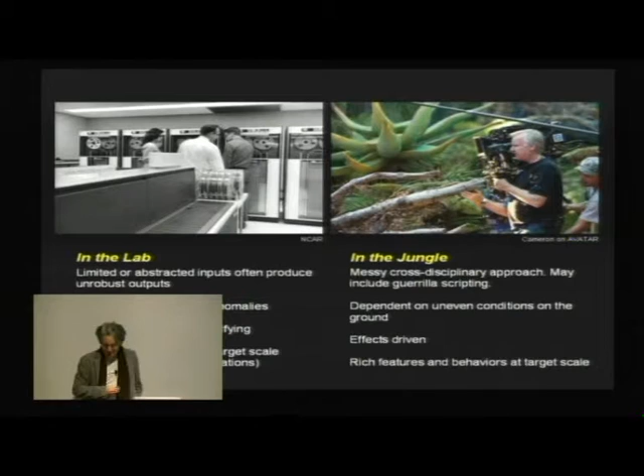This is my father at NCAR, National Center for Atmospheric Research, in the 70s. I used to visit him here. This was the data reels, and we had a punch card lab and all that.

It's also kind of funny that it was a Center for Atmospheric Research, because I consider that to be something I'm interested in as well, in a different way.

So on the right, we have our friend James Cameron and his film Avatar, standing in the jungle. We don't know if that's a virtual jungle or a real jungle or what's actually going on in that picture, but that's why I like it.

The reason I show James Cameron is because I'm very interested in the film business, but that's not why I'm showing this. I'm showing it more because it's a lens for looking at the way an architect can be. I think there's been a lot of discussion today about interdisciplinarity, and making a film is one of the most interdisciplinary things you can do. It involves designers, engineers, film crews, visual effects teams, special effects teams, marketing, distribution, all these things, and including economics. So I think it's kind of an interesting counter model, let's say.

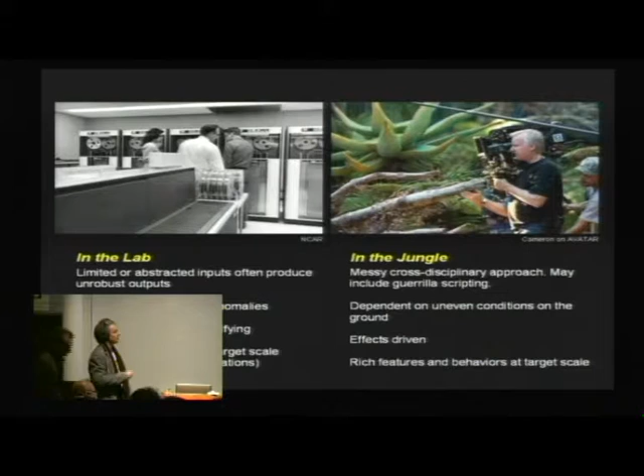Let's say these are two extremes: the lab and the jungle. I think James Cameron probably operates in the jungle. Some of the qualities of being in the jungle are that it's a messy, cross-disciplinary approach. It may include some computation, but it doesn't rely completely on computation, and it may also involve computation entering the project at certain times, maybe not just at the beginning during the generative phases, but later on.

Let's say to characterize a facade or some other kind of building system, it's dependent on uneven conditions on the ground, meaning incredibly context dependent. It's effects driven, and it generates rich features and behaviors at the target scale, whatever that may be. So just float that.

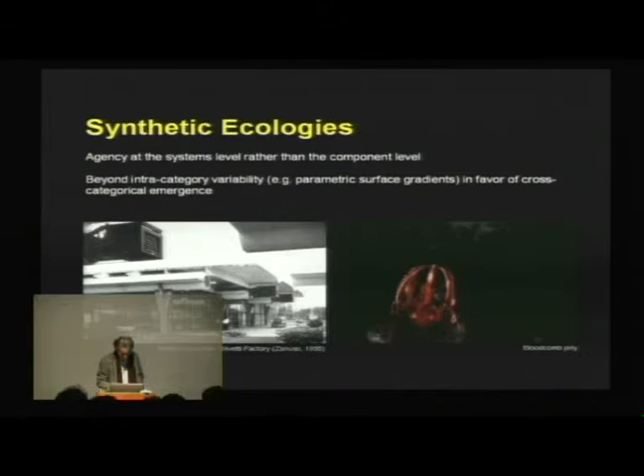A big interest of my office in the last years is in synthetic ecologies, which came up today in discussion, and I think I have a lot of open ears to this at the AA, which I'm happy to hear. One thing I've kind of switched over to since being interested in swarms and agents about 10 years ago is an interest in systems and the agency of systems rather than components.

Part of that interest is in going cross-categorical, meaning avoiding just intra-category differentiation. Let's say one version of that would be a gradient, which I actually mentioned today in the reviews, and moving more towards cross-categorical emergences. The two images are on the left.

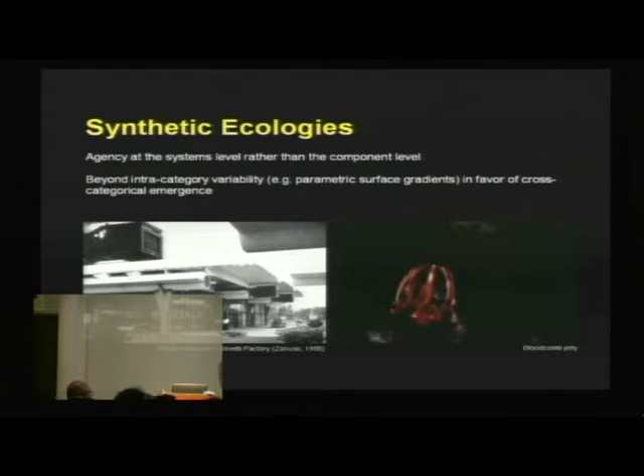You've got the Zanuso Olivetti factory, which is a very early example of someone trying to embed one system within another. I wouldn't say it's in a state of emergence yet. I would say there is definitely a hierarchy there, the structural hierarchy over the mechanical. But what's really interesting is that you do have the possibility of interweaving mechanical performance and structural performance in a single building.

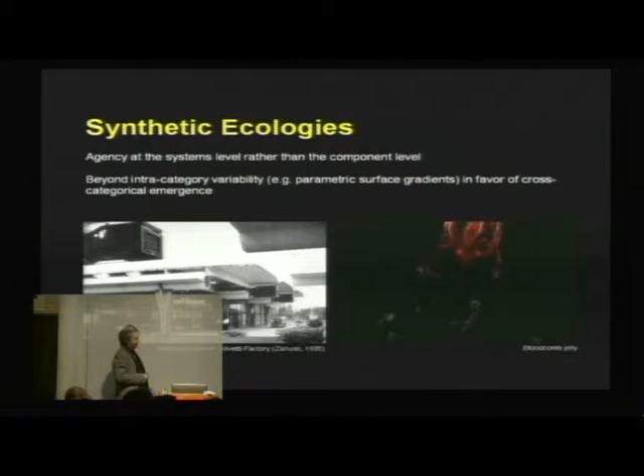So on the right, a counterexample to that, or an extension of that interest, would be the bloodcomb jellyfish, which is super interesting because it's actually a composite of two different creatures: on the one hand, a bioluminescent bacteria, and on the other hand, a transparent jellyfish.

The way this works is that the bacteria gets access to additional food sources, and it's also protected by the jellyfish, so it's getting that from the relationship. The jellyfish, on the other hand, is getting a kind of stealthing mechanism. Because the predators of this jellyfish are in deep water and it lives at midwater, there's a kind of interference pattern that goes on between the color kaleidoscope effects and the sunlight bouncing off of the water. So it's a kind of stealthing mechanism.

So I would say that the bloodcomb is a kind of emergent third organism, and that's precisely what I'm interested in in terms of the integration of systems.

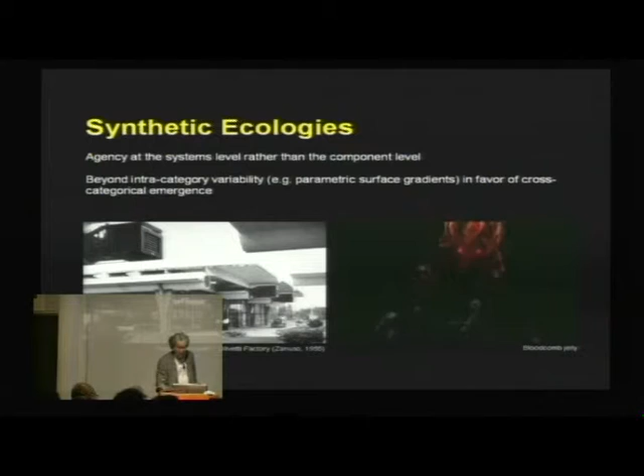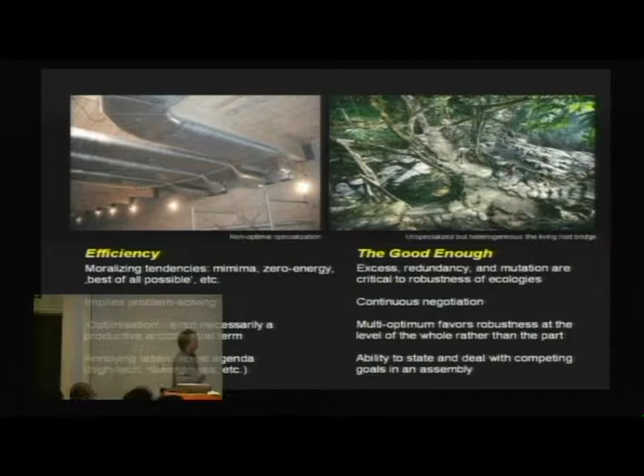So things you find in nature: excess as a matter of course, redundancy. In all systems you find redundancy, and mutation are critical to robustness of ecologies. You find continuous negotiation. The multi-optimum favors robustness at the level of the whole rather than the part. And within this good enough, you have the ability to state and deal with competing goals in an assembly.

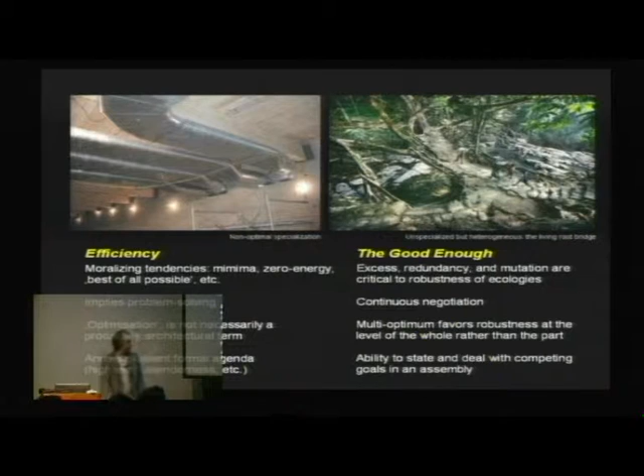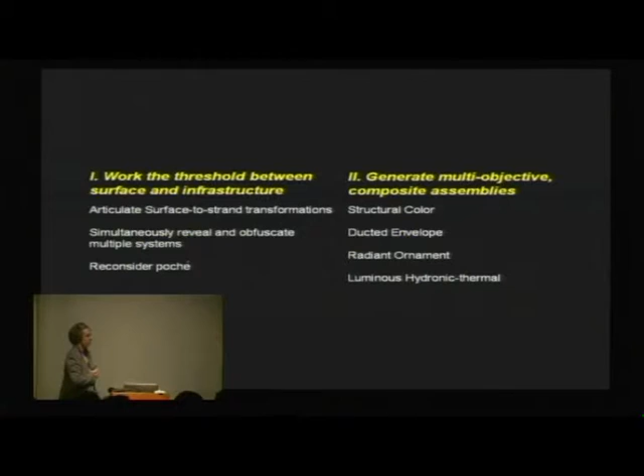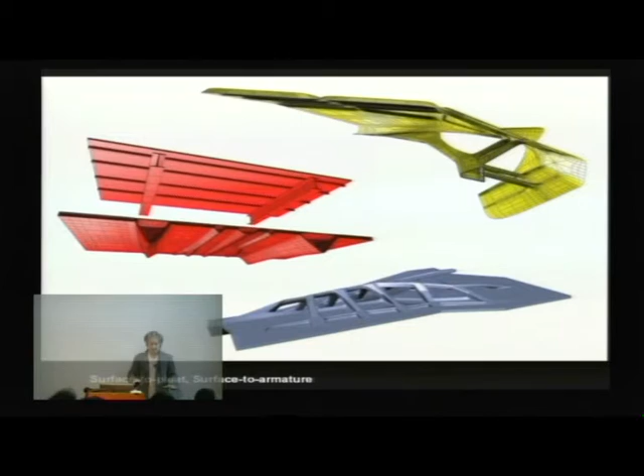We won't do that one. I'll show you the beambrane in a minute.

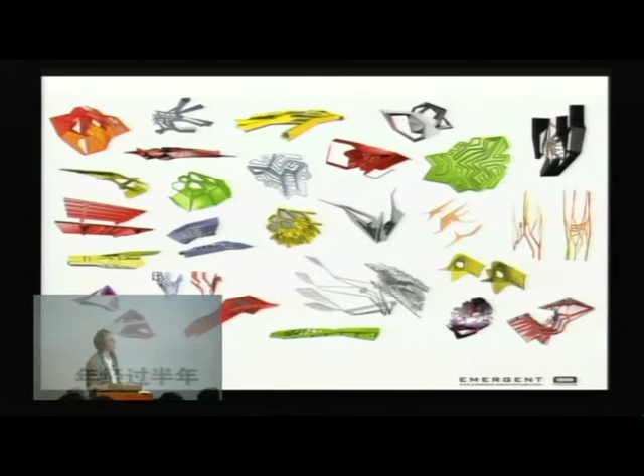So here's a few of these guys. We have this huge collection of these things, and it's getting kind of fun now. It's kind of a menu, not that we order off of it, but they're collecting. I call it the menagerie.

And if anybody speaks Chinese, I would still love to know if this says menagerie. I doubt it. It was published that way, and I still don't know. I heard something that it's not right.

So it's the menagerie. It's the zoo of a lot of these species that we've been using for various projects.

And now I want to show a couple of prototypes that are a little bit more in depth, which were developed in the summer this year, with an interest in developing multiple systems in prototype form, meaning in sort of a chunk rather than in a whole building, and also with a consideration of materiality.

In particular, the place that we are in right now in history, which I would say is very similar to the one that Viollet-le-Duc was in about 150 years ago, right at the moment where stone load-bearing construction was giving way to iron and eventually steel construction, which I found a kind of hybrid, interesting point in history.

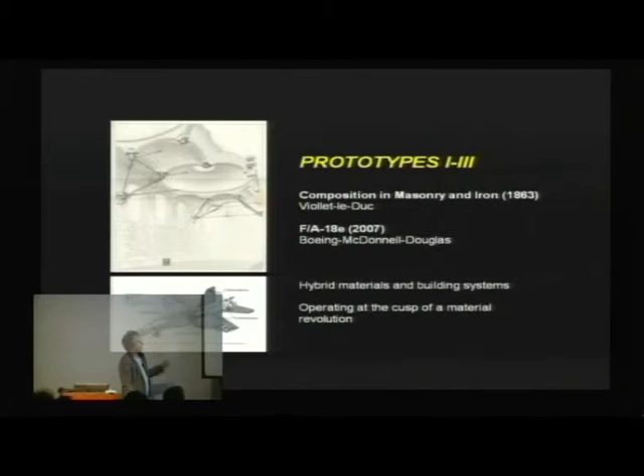Also looking at, of course, aircraft construction, which is all about different kinds of patterns: aluminum, carbon epoxy, steel, everything known to man is basically in these airplanes now, with different kinds of configurations, and also produced by different companies.

So the first one is called Thermostrut, and Thermostrut is a kind of combination of something which is a structural system, a skin system, an aperture system, and also something that generates thermal solar energy.

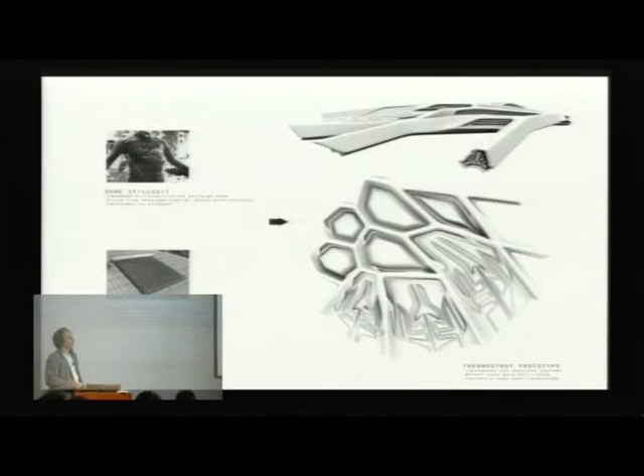Maybe I have a better picture here. So this is still in the realm of frame and skin construction, but it does have a more active relationship between the frame, which is this custom welded steel profile, and the skin, which starts to relate to the profile. And then it also has embedded tubes for solar thermal, and then also other areas which are made out of composites, which also contain fluids that flow through it.

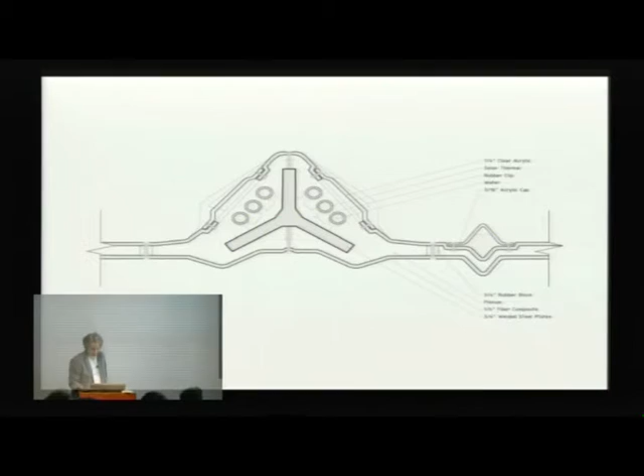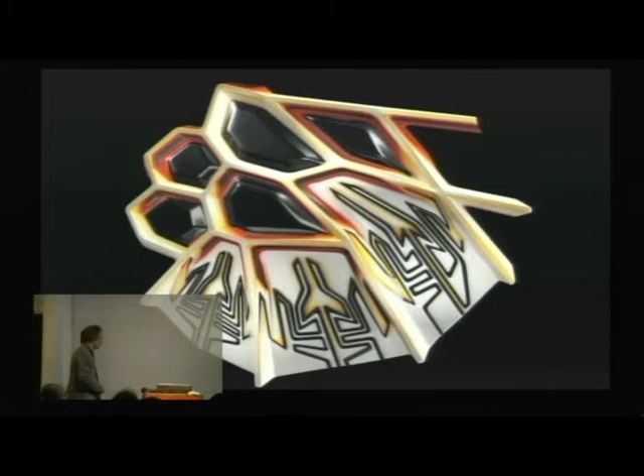So here's a model of it, and you can see here that there's also color associated with this prototype. So it's operating on many levels. It's generating thermal energy, it's structurally sound, it has apertures, and it also has this kind of ornamentation that ties it all together. This color and ornamentation that ties it all together.

So some of the solar thermal is embedded here in these black tubes, and then also some of it's embedded actually inside of the apertures. So that's the first prototype.

Another one is called the lizard panel. The lizard panel is basically a combination of an algae system. Algae systems are photosynthetic systems that can generate oxygen as a byproduct, but they can also generate biofuel and hydrogen gas. They can generate a whole lot of different things depending on the additives that you put in it. The thing about them for me is that they're usually applied in a kind of industrial application.

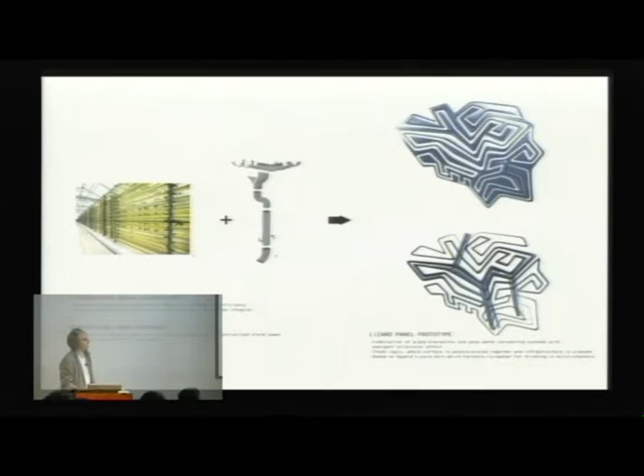So the idea was to loosen that up, but also combine it with a water reclamation plant. Here's the model of it, where you start to get an algae system embedded in the panel, which is a separate tube here than the surface. And then also these areas in the panel which can collect water, so these kind of depressions that wind around and through the algae system.

The most interesting thing about that for me is that if you try to understand the thing as two different systems interwoven, they're not just laying on top of one another, but they're interwoven in such a way that down below the panel, you start to get some structural performance by adding depth between the two systems.

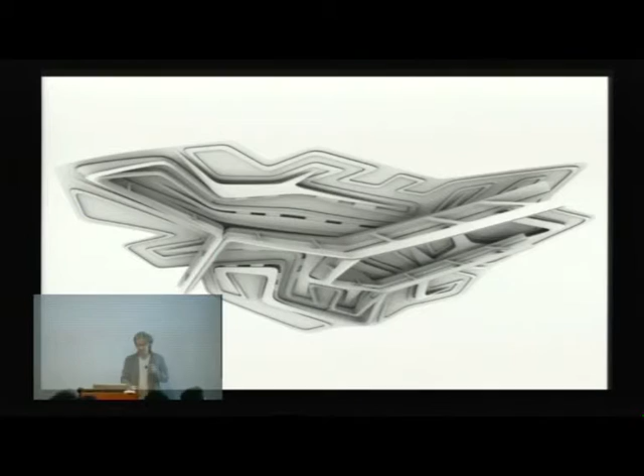The third one is called tracery glass, and it comes from an interest in stained glass, and in a rethinking of the high tech — let's say Renzo Piano, whose building in LA used to be right across from my office, so we looked at it all the time.

And trying to deal with the layering of systems that goes on in a Renzo Piano building, or at least the one across the street from us, in terms of shading, cooling, and structure, and then thinking about the beauty and simplicity and emotional response involved in stained glass, and trying to think of an alternative to either the purely ornamental or the purely technological. So we came up with this.

What's going on here is that you've got a structural system. You have these apertures, they're bubbles, so it's a two-sided system where you can generate a lot of heat. That heat is picked up by coils here. So again, we have a solar thermal system, and in addition we've got a solar PV system right here, which is also embedded into the windows, with its associated wiring and all of that.

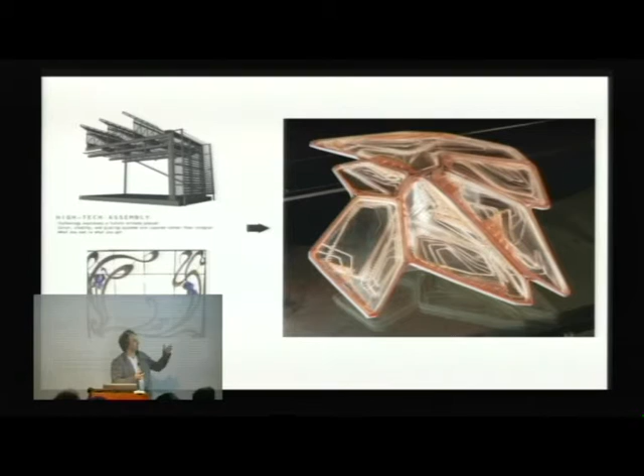So through the deployment of these different technologies, you get some sun shading. You get an impeded view out through the glass, so it's no longer a kind of modernist idea of glass. I actually like the effect of having these things embedded in it, and you've got these other things going on, this energy generation as well.

This also took on layers of color, which I liked very much in the sense that they could begin to dissolve the structure versus the polycarbonate panels here, and start to tie everything together in a much more loose and gauzy way.

Okay, so here's another project which is a kind of prototype. It was for an exhibition last year. It's called Batwing. Batwing came from looking at a lot of ceilings — I've gotten kind of obsessed with ceilings, in particular ceiling panel systems, and also fixtures.

I mean, here actually I was checking these out today. I don't see too many — at least you don't have too many air exhausts in here, but you do over here, hidden.

I think ceilings are something that have been left out of a lot of discussions. Not because the ceiling is particularly important, but because it tends to be a place where a lot of fixtures are put in a haphazard way based on building codes, and never really dealt with architecturally. So I thought this is an interesting place to start, also because there tends to be a lot of technology in ceilings — rethinking the air diffuser, the problem of the air diffuser, and also the ceiling system.

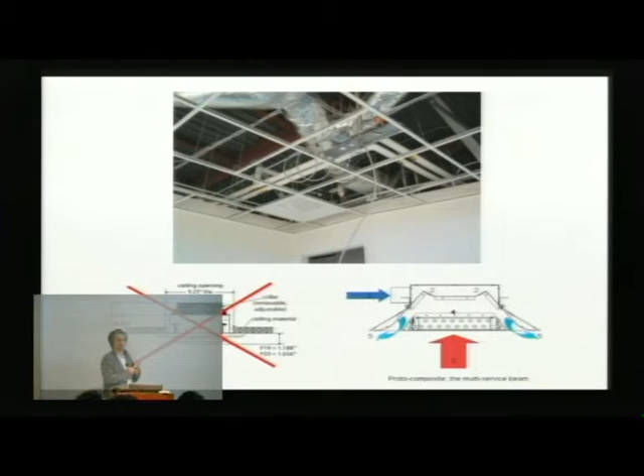One example I found, I think, is a proto example of a new way of thinking about technology in the ceiling: a multi-service beam. It's not custom, but it comes with a cooling element, lighting, fire alarms, and all that kind of stuff embedded in it. I think it's a kind of tool for engineers, but it's not yet architecturalized. That was the goal of Batwing.

Batwing is based on a fluid system, a radiant system for heating and cooling, and a microcapillary system, meaning tiny little veins filled with water. I think microcapillary systems are coming up. We'll find them very soon in a lot of architectural surfaces, so I wanted to take that on.

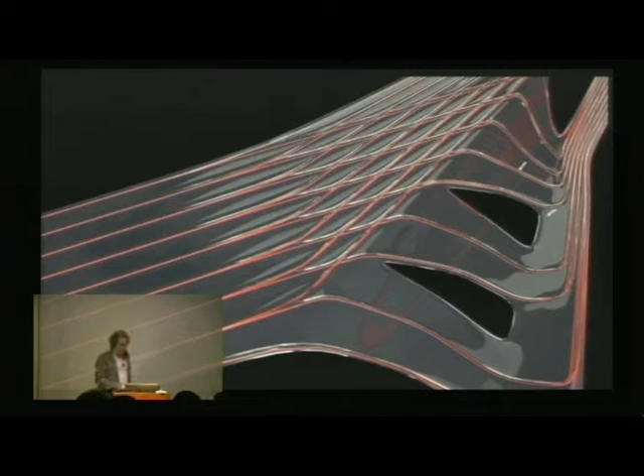That's one component. The other component is a morphological one, where through double delaminations of the surface, we start to get hollows through which we can send air, at the same time increasing the structural performance of the ceiling.

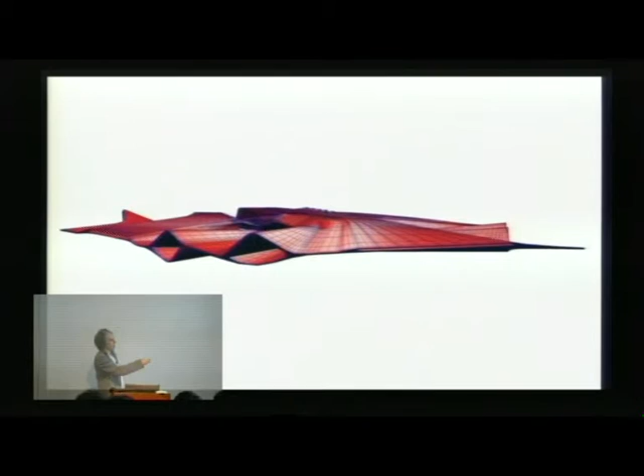You see here how there's air distribution going through this thing, which is then passed along this lattice of microcapillaries for heating and cooling. So you don't have central air—you just send air where you need it to go, and then run it across for heating and cooling locally with this water system. There's also lighting associated with it so you could actually see through.

So this is, say, in the room, and this is from above. This thing doesn't—it's a prototype in the classical sense, it doesn't solve all problems, it doesn't have a particular scale. It's just kind of a study.

One important thing is the types of morphologies going on here. You have the surface to pleat, where you start to register things in surfaces. Then you have the surface to armature, where the pleat actually begins to pull off and become an armature. And then you have these microcapillaries inside of a microrelief on the surface. This stuff is, if not more important than, the technologies embedded in it.

Here's some pictures of that prototype in my office. We had it made in China, of course, and at the show. So here's a quick building project to show an application of Batwing at the building scale.

This is a project I did with Yansong Ma at MAD. He was the client and master planner of a pretty large development in Guiyang about a year and a half ago, and it involved a lot of high-rises. Our project was a high-rise, 110-meter building, and the idea was to take on a dual interest there.

One interest was taking on mechanical systems, starting to architecturalize them, but doing so in a way that does not continue the structural expressionist movement from the 80s, but is much more contemporary and allows for a kind of gauzy, lighting, luminous effect in addition.

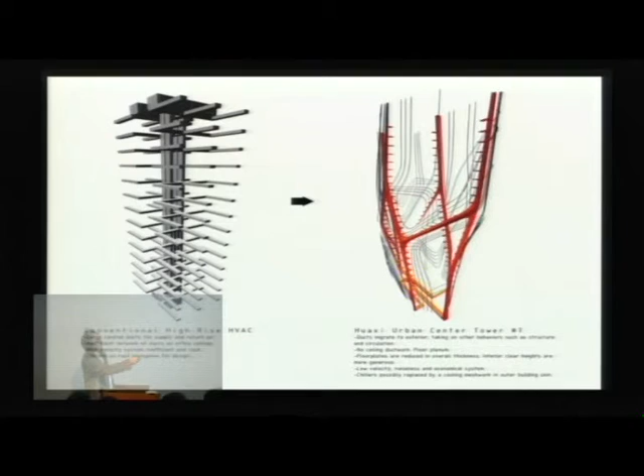So here's the basic technology of the thing. It's intended to be a series of super columns around the project which take structural forces, deal with lateral loads, and also deal with the movement of air, pushed through by the stack effect.

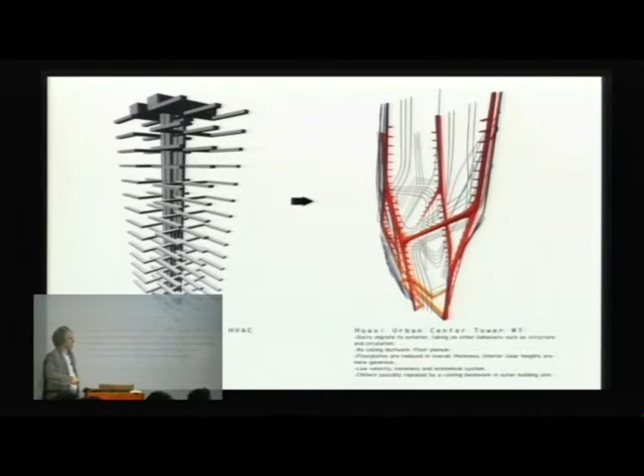Then there's another system, a system of microcapillaries, which is about expelling heat. The idea here was that instead of having a condenser on the roof like all high-rises have, we unwind the condenser and spread it all over the architectural surfaces as a gigantic heat exchanger—an alternative to a conventional system using risers and ceiling ducts and all those things.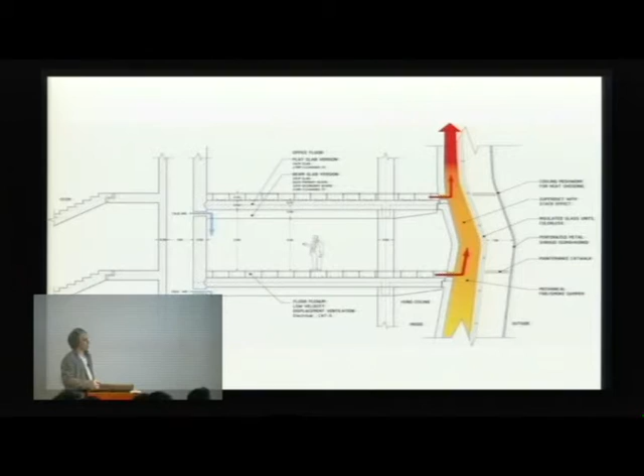The air is brought out of the building and exchanged, and then the cooler air is brought in. In plan, you see how one of these double delaminations might work.

In this case, it's not just a single prototype material, but it was broken down into a facade that goes around and becomes a megapleat, and a structural member—a precast concrete member in the back—which has holes through it in order to get air locally into the ducts at the floor level. There's an additional outer layer, which is perforated, allowing for that gauzy effect, so you don't necessarily read ducts on the exterior, but understand the thing as a whole composition of lighting, structure, and mechanical systems.

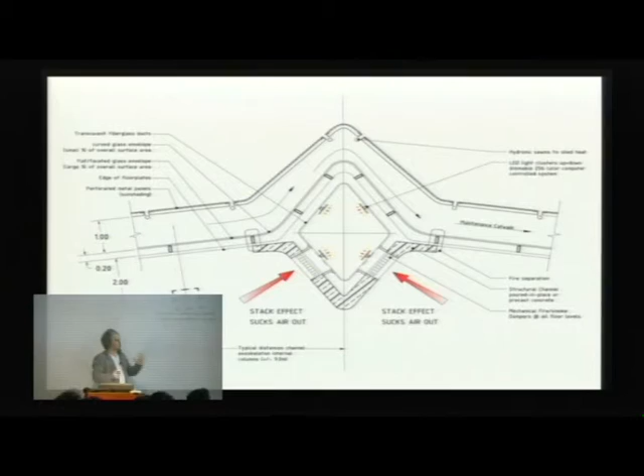Different project, this is from a couple of years ago. It's called the Novo Pavilion. It was a competition, and it comes from an interest in combining a grid-stiffened shell logic with alligator skin, or let's say variability in alligator skin—actually very much like the dragonfly. It goes from quad cells, which are armored and very stiff, to elliptical and round cells, which are all about flexibility. So trying to apply a kind of more biological logic to something which is an important architectural type, the grid-stiffened shell, or lamella construction.

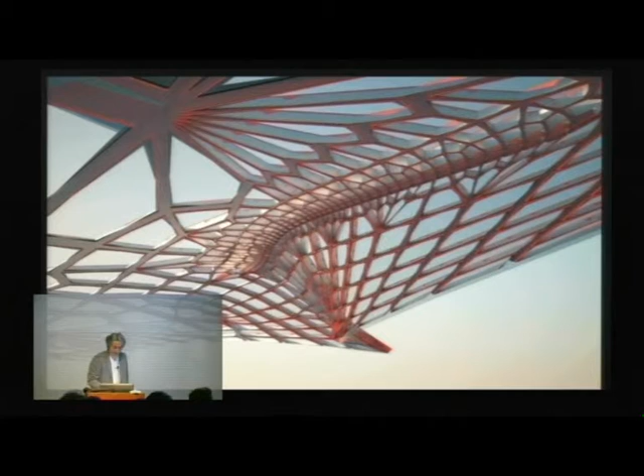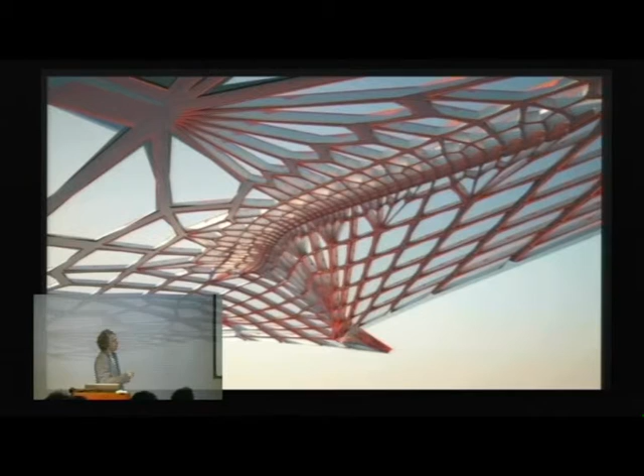So here's a first study of how that might work. The thing we were going for was a lot of difference inside of the system that could respond to different factors. This one doesn't have depth variability yet, but that's one of the factors that changes. The other factors are going from a grid to a kind of branching system, to even a radial system in some areas. So the intention was to have a much more radical difference in the pattern.

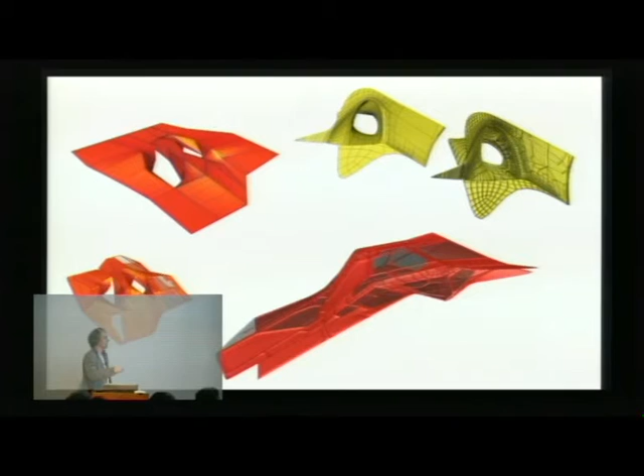So here are some studies, some of which are relatively straightforward—they key pattern to curvature, so you have a lot more breakdown of pattern where there's more curvature, and you don't in other areas. And then other ones have a lot more work done on them by hand, and also with the engineers, as to what are the main force lines and what we're going to concentrate on here. A kind of editing of a natural panelization that comes out of the software we are using.

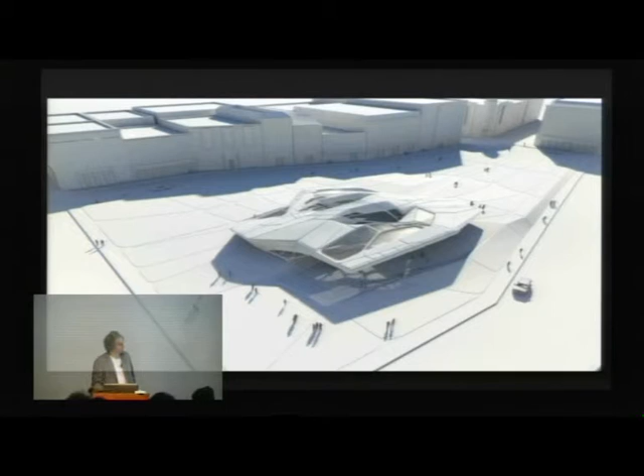So this is the project. It's really just a pavilion, it doesn't have a complex program. Interesting here is the shape, and not just the pattern—the shape was critical for holding the building up. So what we have is a slightly arcing roof, but it's characterized by these two large vortex-like areas, which basically add double curvature to it, which increases the overall stiffness. So they're like two gigantic super columns organizing the space and also acting structurally.

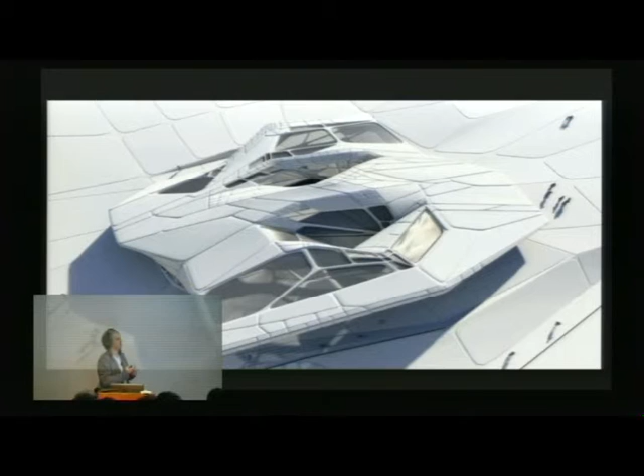So this pattern on the roof, again, is an architectural pattern. It's not just a response to particular parameters relating to surface curvature or engineering parameters, although those are taken account of—it's also a pattern that was precisely designed for a certain kind of character. There's depth variability in the system as well. This is the elevation, and from the top.

So this is a similar project. It was done a little bit later, but I guess it builds on the Novosibirsk project. It was for Sundsvall—it was a competition for two theaters in Sundsvall. One of them is a concert hall, and the other one was an opera.

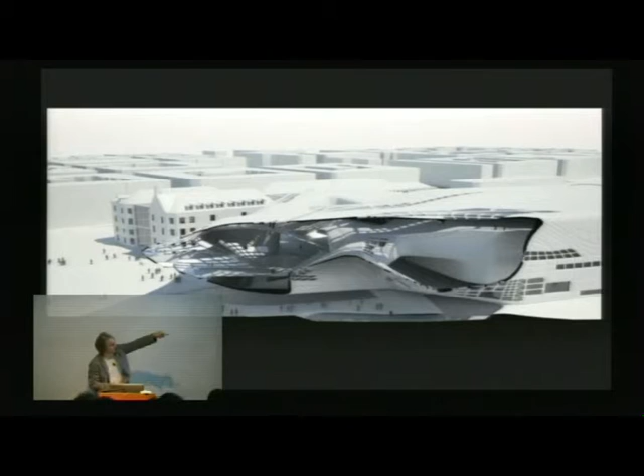This project was also interested in relief, interested in structural variability, and in this case we wanted to take the idea of the shape of the overall thing to a new level, which was to make these involutions more interconnected and also force them to do more work than just structural work. So they actually go inside and become the circulation of the building. These are the theaters. So this thing's a kind of topological continuity from inside to out—the theaters are right here, and then it sucks back around like a Klein bottle onto the exterior, which also happens to provide a main loop of circulation from the ground level up into the two theaters.

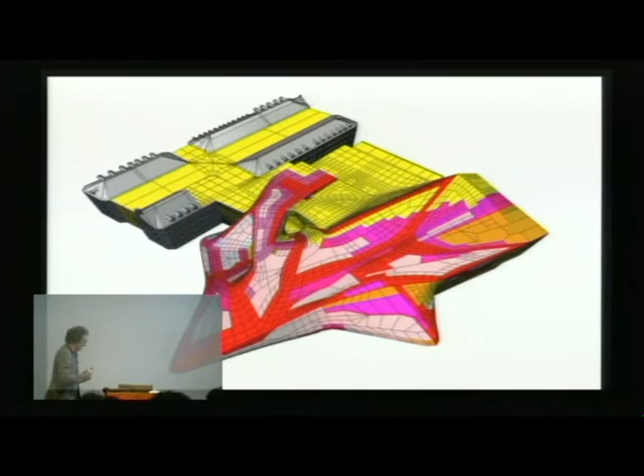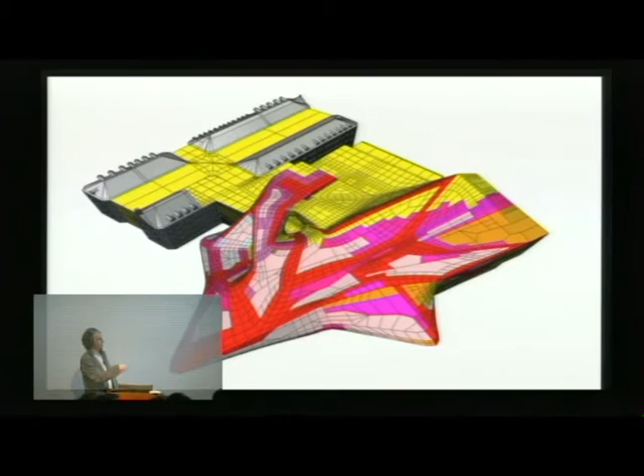One important thing for this was, again, a competition done very quickly, but with Buro Happold on this one, and really fun to work with them. We basically set them the task of doing the fastest structural parametric model of all time. So we sat down, and in an afternoon, with some very unrigorous structural analysis, we decided the main force paths going through the structure, and some secondary zones where we needed additional depth to the structure. We used this as a basis for further modeling on the project, and added some control lines so that we could add depth variability to the structure.

We also associated window openings with depth variability, as well as with actual views outside of the building. It wasn't a one-to-one relationship where deep structure means windows, but that was one of the ways we started to associate things together.

Then there was this idea of having the interior switch in terms of kind rather than just degree. So sometimes we have a shell construction with some relief in it, which then skips and becomes a kind of truss network in areas where we need additional spanning. This is where it gets interesting, where you're not just increasing depth up or down, but actually switching systems from a shell-based system to a vector-based system.

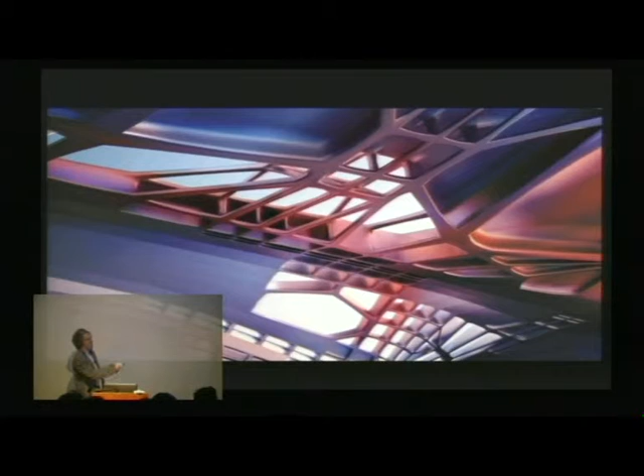And in addition, we added the layer of color to that to make that more intense.

Okay, so this is Dragonfly. It's based on what I mentioned before — I described the wing already and the kind of dual morphology. I did Dragonfly with Buro Happold, and we had endless discussions about this project, which was quite fun.

The Great Court for Norman Foster — they also did, I think, a more interesting building, the Smithsonian with Norman Foster, which takes on some of the logic we were working with. Basically, the idea was to search for variability in the structure that would increase the performance of the project, but also increase the aesthetic characteristics of the project.

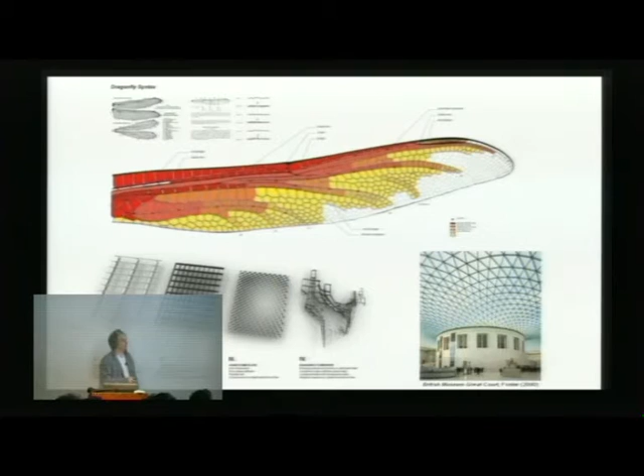So this is not about engineering optimization per se, although there was engineering done on this one at a higher level than the competitions. We used this idea of veins to locate areas. We took the logic, the grammar, from the Dragonfly Wing — basically the quad cells, which are folded areas in the wing, versus the membrane areas.

We weren't interested in reconstructing a Dragonfly Wing, because clearly that's about performance in the air — this thing is not about that. It is a canopy project, but it has multiple points of touching down inside of the gallery. This is the SCI-Arc gallery, and it was an exhibition there.

It was an installation, and you can see we basically started in the middle of the gallery and worked outwards, grabbing onto things that were available structurally. There were only a few things: a mezzanine in the back, which was steel, a concrete column, and a few other things, mostly in the back. There's also a big sheetrock wall which we couldn't put any loads into.

So it ended up being a kind of a setup — we forced the thing to cantilever 50 feet with a 10-foot backspan, just to see what would happen when extreme forces run through it, and how it would begin to reorganize morphologically. Here's how it's connected in the back.

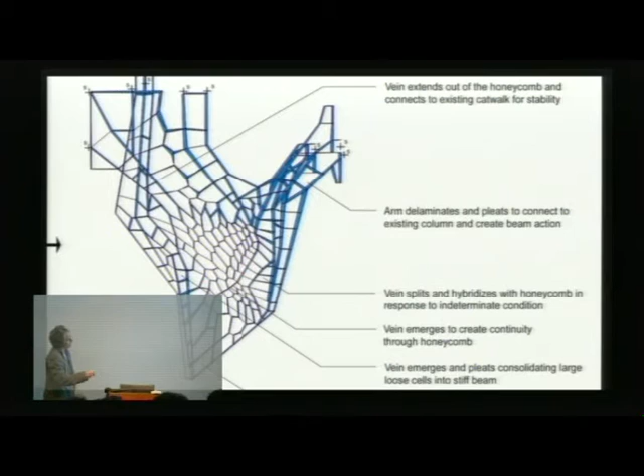There were several boundary conditions applied to this thing in ANSYS, which is a population-generating software — cell size, cell density, overall depth, and local depth, among other boundary conditions, which started to differentiate it more and more. You can see an early version versus a later one. The process took two months of engineering, feedback engineering, and some of the parts I really got excited about came from the engineering software.

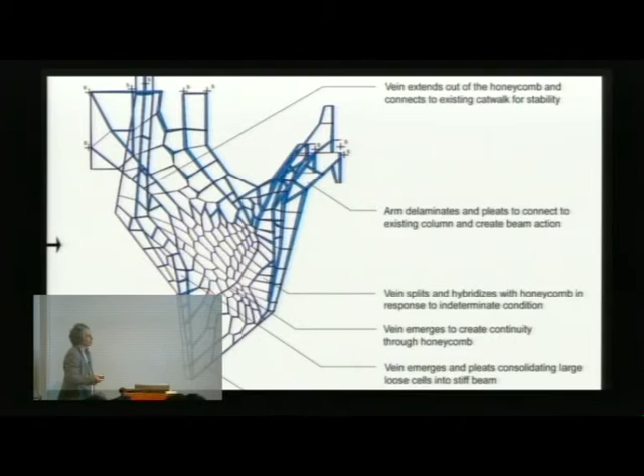First, the reorganization of a lot of the membrane cells towards the center of this thing, where there's some vaulting. And then also some hybrid moments where you start to get linear elements somehow related to the quad cell areas, but which actually begin to run through the membrane. So you get these hybrid areas emerging out of the interrelationship of both the shape and the pattern logic.

I'm going to cruise through some of these here.

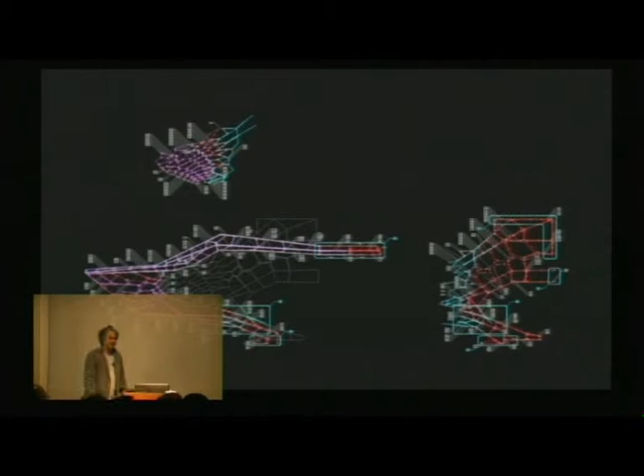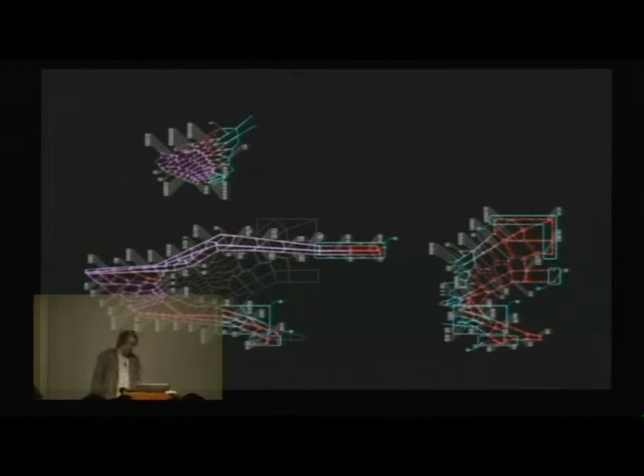This thing was also done in CATIA, which was a learning experience for me. This is the parametric plan that we got out of CATIA, so it was always being updated based on the engineering. Very, very easy to update. All of the leaders, notes, and angle information were constantly updated as we worked on it.

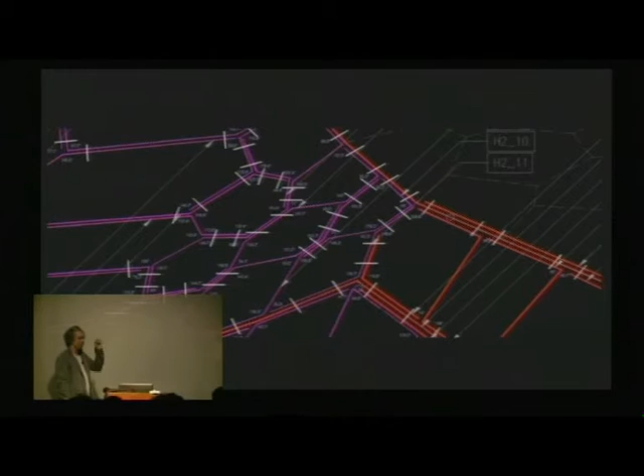This is also one of the more interesting parts of the project. Here you can see where we also, as a final boundary condition, as a way of fine-tuning the structure, developed a construction system where we could layer material. This is all 1/8 inch aluminum, and there are some panels which are only a single layer, and others which are 4, and extremely thick areas which are up to 11 or 12 layers. The idea wasn't to throw material at Dragonfly to make it work, but that was a final way, after dealing with shape and pattern and all the ways of refining the architecture, to just make it work. But that also had a nice quality as well.

In CATIA, you can visually pull all these panels apart so you can tell the difference in how many layers they are, and these are all the bolts and all the angles and stuff you need to build it. So there's a packing algorithm that we used. There's the piece.

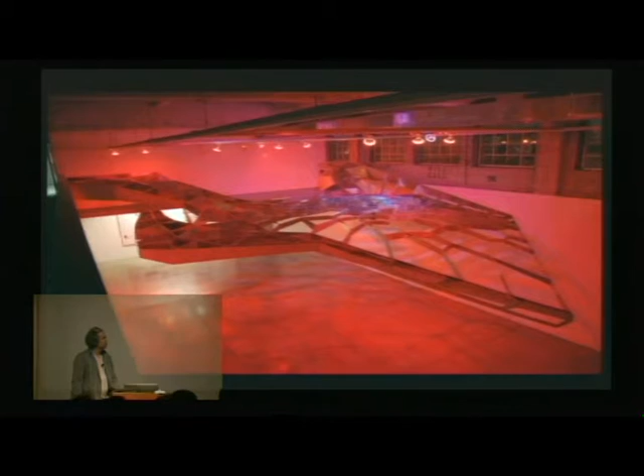I was a little sad about all the bolts. We were going to do structural adhesive, but the engineer didn't want to do it.

So here it is. You can see really big differences in depth. Some vaulting here, this is a delamination. You can't see the top leg of this thing, but it's been delaminated, and the leg is grabbing top and bottom on that side. Here it's grabbing up in the corner and then underneath the mezzanine.

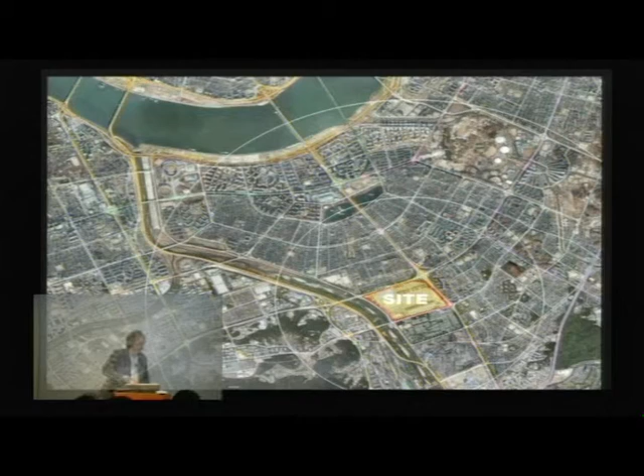This is a much larger project, but it was a chance to take the Dragonfly logic to a building scale, which was always its intention. This is called the Garak Market in Seoul, Korea, done together with Changjo architects in Korea last summer. I think the students did a fish market here too. This thing is also a fish market—it's the biggest one in Korea.

Really interesting building type, sort of accreted over time. The idea from the government, from the mayor, was that we should offer more green space, number one. Number two, that we should ameliorate the smell of fish, and number three, that we should offer some kind of public functions.

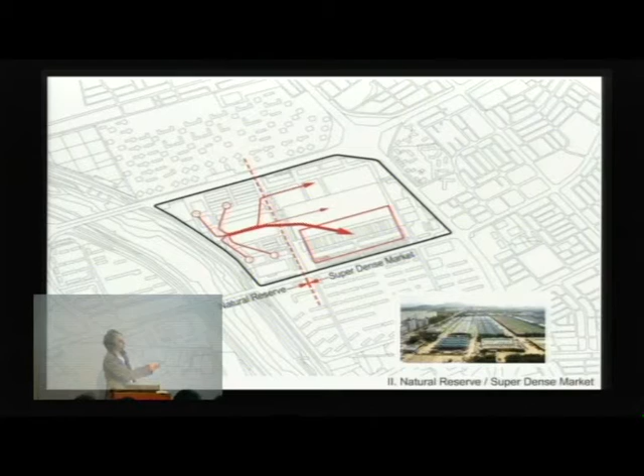So the first idea with the local architect was to take a lot of the market here that's close to this canal and double it up on the market in the back to open up a wetlands area. Probably the reason why we lost the competition, I think, in retrospect. But this was the main move—to double up the size of the levels of the market and have trucks accessible to 2 levels of market.

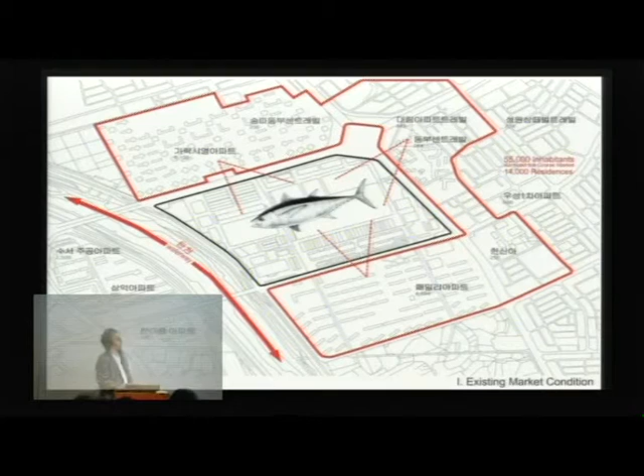Then we also wanted to propose a kind of roof landscape to get rid of the problem of the fish, at least the visual problem of all the fish guts and that stuff. And then we wanted to offer this community garden to all the people living around here. There's about 60,000 families, and we thought it would be nice if as part of this roof structure we could offer these little micro gardens.

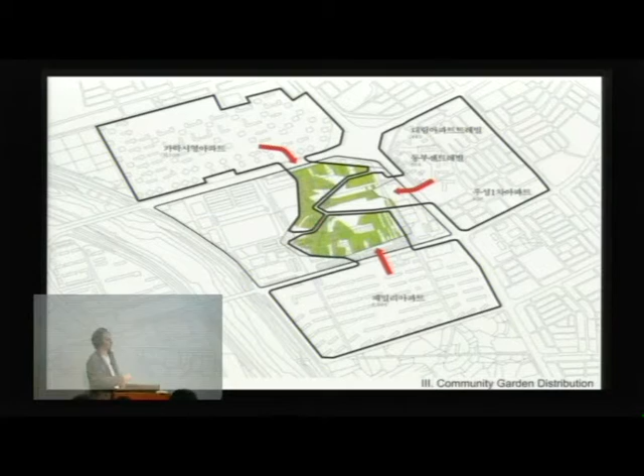So we thought about patterns of patterns and flowers and vegetables and all these kinds of things—organic material, but also a structural principle. The structural principle was based on dealing with the fact that the market required a very ruthless and rigorous column grid, and then an area which would begin to be more loose and open-ended, and also cantilever out. So that's how we set up the pattern.

The thing is about 1,000 meters long. It was a pretty big project. So the ground level's relatively straightforward, tons of market.

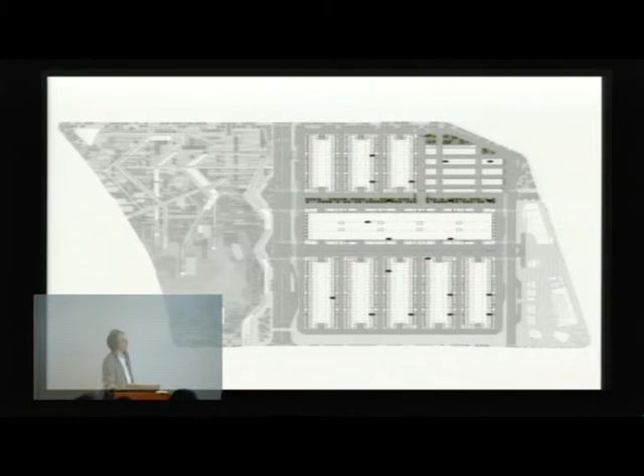As you move up, you see that the thing is organized by extremely mega elements and then very micro elements.

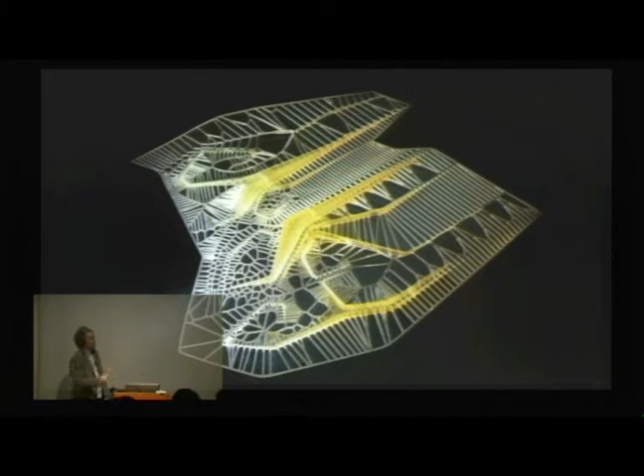It was asked that we put a kind of shopping mall on the roof of this thing, and it wasn't clear how to do that. We were first just going to litter the roof with a bunch of buildings, but it didn't make sense. So what we decided to do instead...

...is offer some kind of mega pleats, some double pleats in the roof that would allow us to let the roof ingest the shopping mall.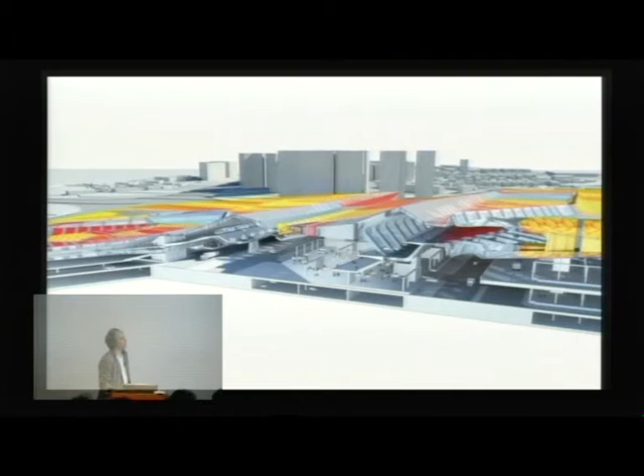So you get these gigantic beams in the roof, which are also spatial, which also allow people to be up inside the roof looking down and understanding the market and all of its functions without actually being in the market, and also have access up to the roof and those kinds of functions.

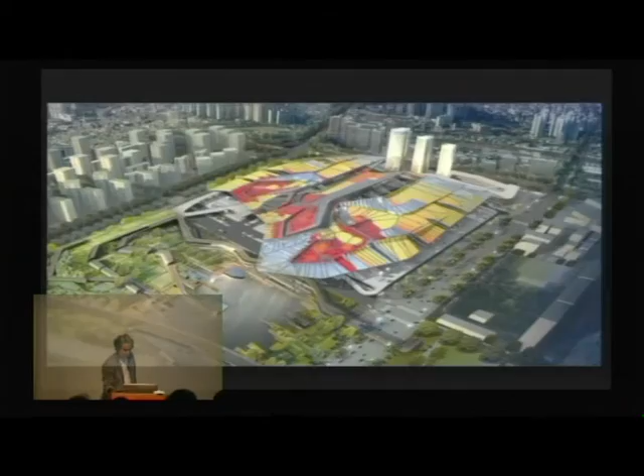So, well, there it is — that's probably the best view. I don't think I'm going to show this, I'm going to skip ahead. I don't know how to do that... I'll just skip ahead.

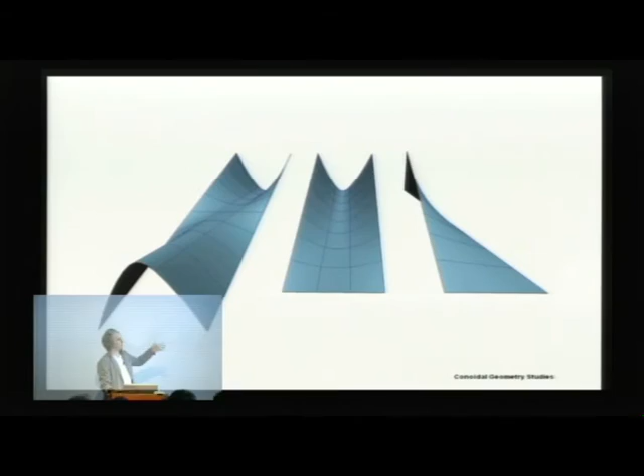I'll just say really quickly, this is PS1, one of my oldest projects. It involved a kind of cellular structural system, and it was clad by a skin which was based on parabolic and conoidal geometry made out of expanded aluminum mesh.

Which, when rotated in different directions, allows you to have a day and night kind of effect. So if you rotate it one direction, you pick up light, and you rotate it the other way, and the light goes through.

So during the day, it's a huge shading mechanism, and during the night, you actually begin to read the structural cells, some of which were up to 50 feet long.

Okay, last couple of projects. This one was a competition in Taipei, last year — 3 theaters in a really great site in Taipei, and a pretty strict brief.

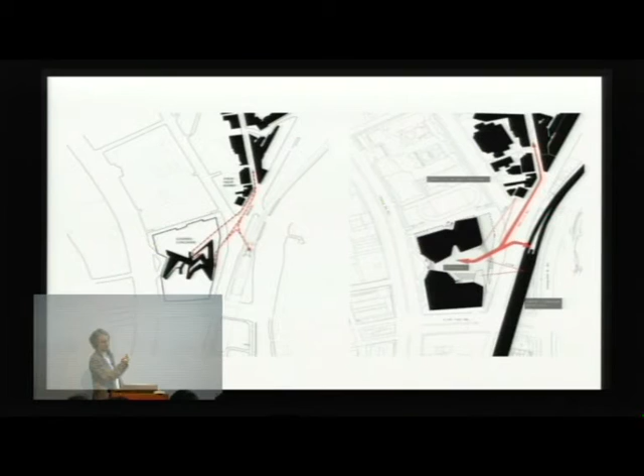The brief basically said, this is the site, and this is the main railway, and this is the Shilin night market, a really interesting farmer's market that's open at night. So the brief asked that you enter from this side, so that was kind of a given, and also that the building has a really tight connection to the Shilin market.

So we decided to bring some of the qualities of the Shilin market into the building, into a kind of concourse inside of it, and at the same time lift the building up to allow for this kind of big public entry.

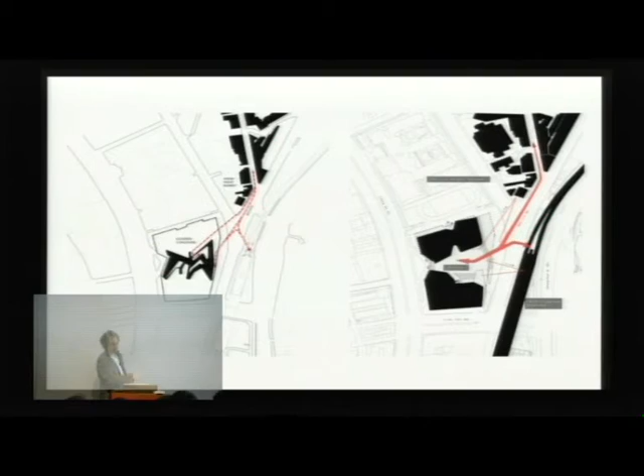So the project here was generated out of a really large surface, which then started to have mega armatures hanging down below it, which acted to connect the 3 theaters. There's 1, 2, 3 — this is the gigantic theater, in a kind of concourse.

It acts as a kind of structural bridge connecting all the parts together, but also acting as a gigantic ceiling-scape to the public space below.

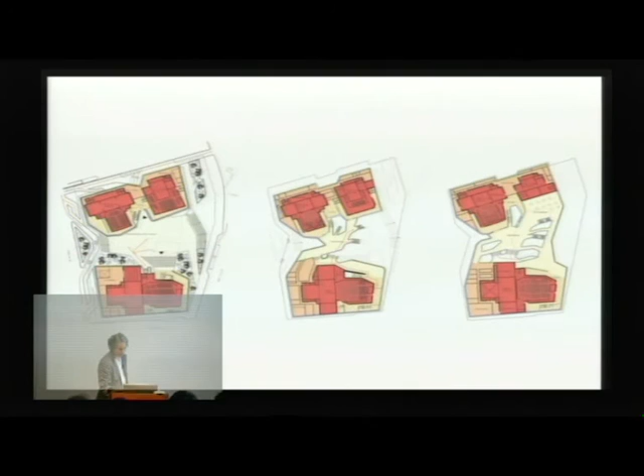There's the plan. That's some of it — you can see that there. This is a view from directly below. You can see that there are these apertures that run all the way through, all the way up to the roof.

So you've got a kind of composite here of ornamental elements, a structural system spanning between the 2 sides, and all of these pedestrian pathways, these gigantic armatures, and then in addition this kind of color gradient.

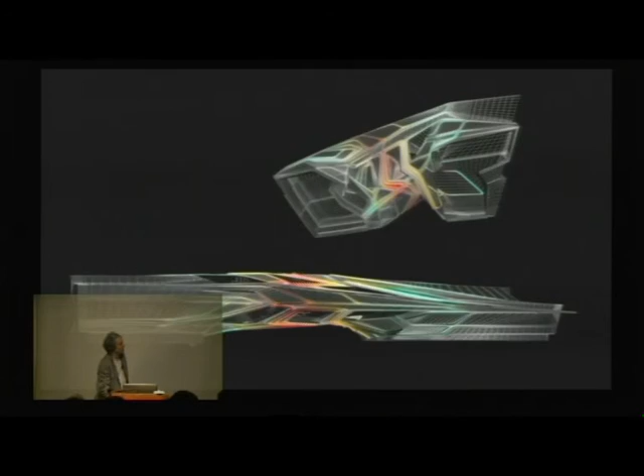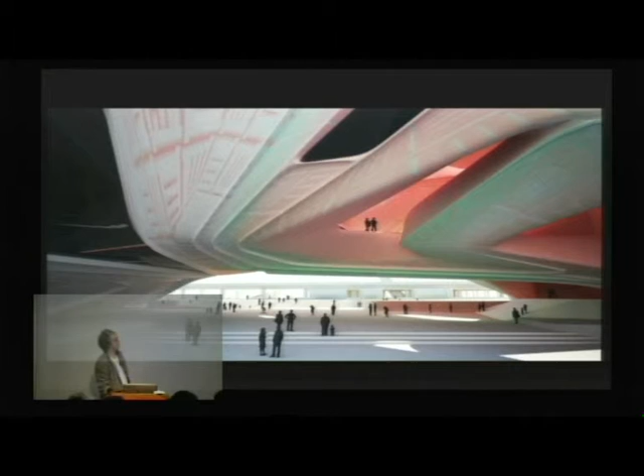So here you are underneath — that one's not so bad. We also got this, which was kind of a mistake in the way we were doing the color, which we really liked. It looks kind of like an Aztec pattern, really nice. So here's the main view from the entry from the railway of the project.

And I want to show just one last project — skip ahead on this one. Okay, so there are two bioreactor projects. I'm just going to show the very last one so I don't keep you guys longer.

Bioreactors came out of a collaboration with Origin Oil. They're a company dealing with algae products, and they're really hell-bent on moving past the oil economy.

Really interesting guys, also located in LA, so it's very convenient. And they have all kinds of technology which I guess they don't realize the potential of. They have a bunch of guys in a lab, and it works quite well.

But I guess when I was going over there, I realized the extent to which they didn't know what they had. So we started to talk about these bioreactors and what we could do with them. This one in particular is interesting — it involves a tuned LED system that can actually begin to sense the needs of the algae.

So that you can maximize the production of lipids from the algae. If people don't know about algae bioreactors, basically the idea is that you take a pool of muck, give it some sunlight, or in this case artificial light, and it produces lipids. Lipids are a kind of vegetable oil, which you can refine into usable oil for biofuel. It's actually a huge industry, exploding right now—it's completely overtaken wind, solar, and ethanol. I think algae is going to be huge in the next century, for sure.

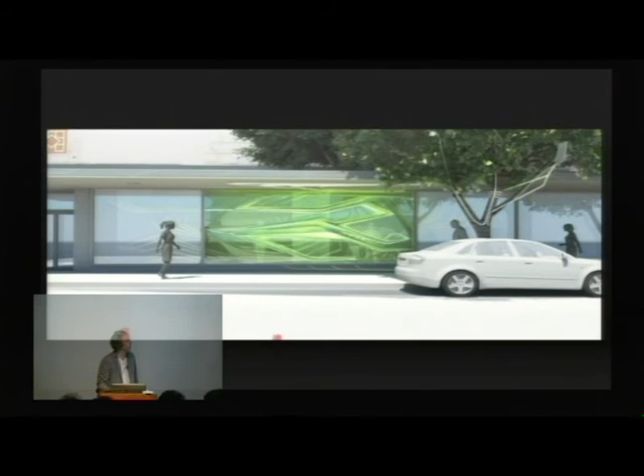So here's the project. It's a kind of micro and macro pleated facade element inserted into the glass facade—an algae aquarium with stuff coming off the sides of it, continuing down the glass facade, which is a kind of tongue-in-cheek ornamental element. Then there's this element which I really like, which runs across the soffit of the overhang and up the tree—we call these the tree monkeys.

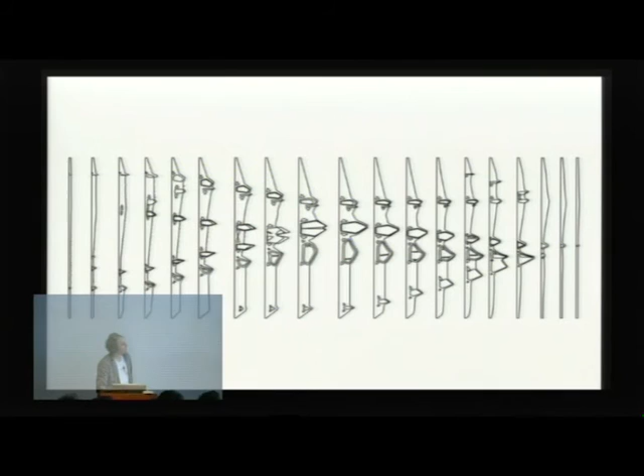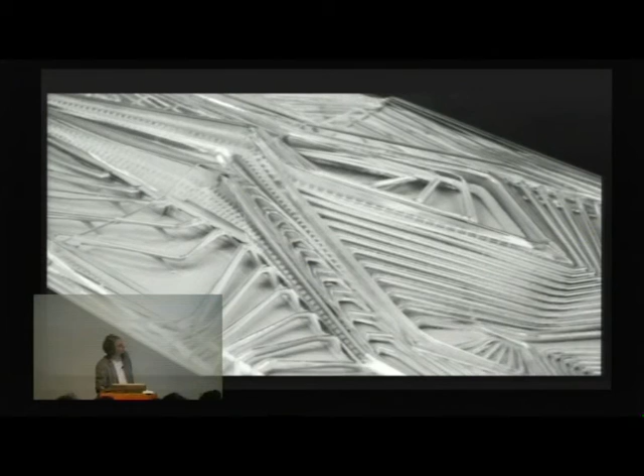The tree monkeys basically climb up the tree and have a few solar panels which run the pumps required to circulate the algae as well as the lighting. Here are some sections through the thing—it's actually quite deep in some areas, about this deep. And here's a model of the insides, showing some of the articulation of the pipes and tubes in the algae system. There are the tree monkeys.

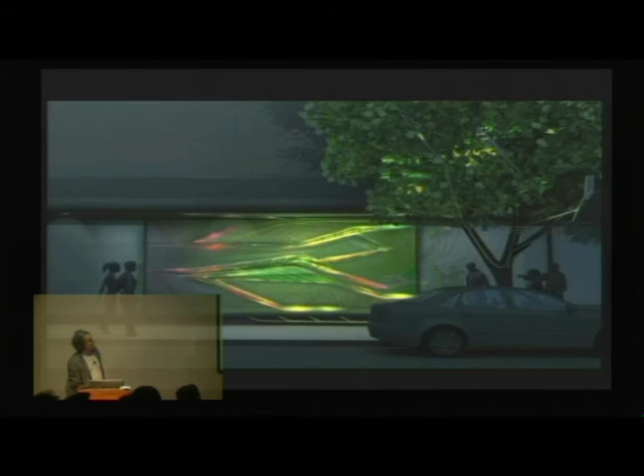At night, the really interesting thing, as far as I can tell and as far as Origin Oil says, is that it's going to have a kind of firefly effect where it pulsates. This is probably sped up—probably much more slowly than this. But it will have a kind of feedback loop and a very atmospheric effect, while at the same time producing biofuel. So I think I'm done.

In more ways than one. I'll take a couple questions and then we'll wrap this up. Is there any questions for Tom?

Everybody's tired. Silly question, I have to ask.

Tom, I'm surprised you didn't reference Bionicles. I just have to ask this because, especially in the latest projects, there is this—I mean, I love obviously the iconography of that kind of thing, and also Japanese comic books. Does that have any kind of impact on your work? Yeah, it's a very light question.

Fair enough. Well, this is something we've talked about before—Bionicles, for anybody who doesn't know, is a kind of Lego set, kind of manga Lego set. No, I don't think that's a direct relationship, but as you know I also have another business in my office, a rapid prototyping business. We do work for all kinds of people, mostly Hollywood stuff, and I'm noticing there's starting to be a kind of infection from a lot of those projects. We indeed have Legos at the office, and stuff we did for various movies, which people are probably familiar with. It's getting kind of interesting because I think I'm straddling now a bit—one business is intended to support the other, and it's not the architecture supporting the other one. Let's just say that. When you make choices like that, I think you're also opening yourself up to all kinds of unexpected things, so I'll take responsibility for that—although not for a kind of cartoonish aesthetic. I'm not interested in that on that level, I would say.